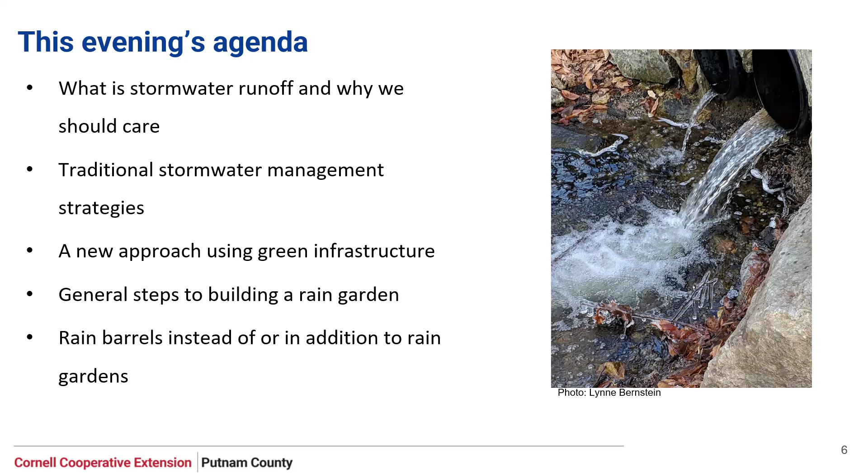In the next hour or so, I'll be talking about controlling stormwater runoff, that is the water that runs off our roofs, driveways, sidewalks, roads, and other impervious surfaces. I'll talk briefly about the way we've traditionally managed stormwater and why this approach is not optimal for our lakes. And then I'll introduce rain gardens as a viable alternative to existing stormwater infrastructure that is effective, economical, and beautiful. And finally, I'll talk about how rain barrels can be used in addition to rain gardens, or instead of one if a rain garden is not an option on your site. I'll also throw in a few other ideas for reducing stormwater runoff on our properties.

So what exactly is a rain garden? Well, it's a sunken garden bed, a landscape depression that's designed to capture surface runoff before it reaches a storm drain or water body. It's planted with native plants that filter and cleanse the water and allow it to infiltrate into the ground and into our aquifers, where it's accessible for drinking and other domestic uses.

On this planet that is about 70% covered in water, only 3% of the water is fresh water, and of that, nearly 70% is inaccessible to us, locked up in glaciers and ice caps. Our fresh water is continually moving through the water cycle. You may remember the water cycle from elementary school or middle school science. So our water is continually moving through the water cycle from the earth to the atmosphere, and how we manage it when it's with us on earth is critical to the quality and quantity of our fresh water supply.

You probably remember something about the water cycle from school. The rain falls and it's either taken up by trees and other plants that transpire it back into the atmosphere, or it infiltrates into the ground where it fills our wells and also maintains our lakes through groundwater flow.

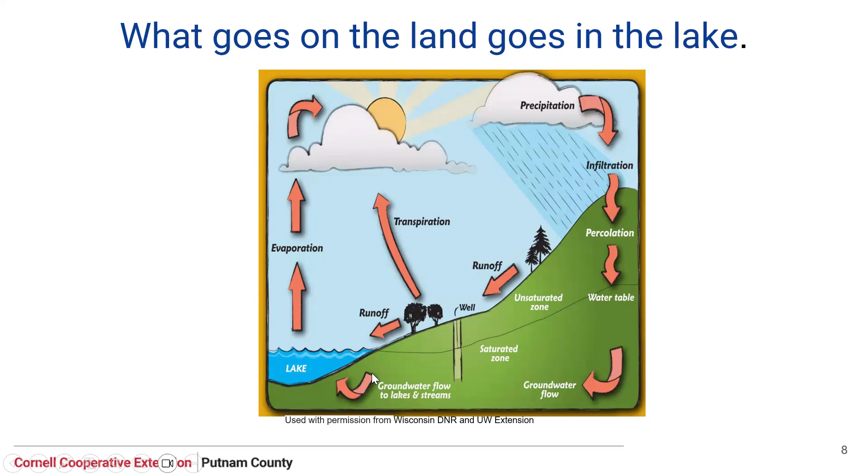I want to point out this arrow, groundwater flow, here. This is the rainwater that has percolated into the ground and is building up in the water table and basically supporting the lake by providing fresh water when the lake level is low, and it's there to sustain the lakes in times of drought.

and because there is this constant connection between groundwater and the surface water that's in the lake. We want our lakes to be filled with groundwater, not with runoff. Groundwater is filtered and clean, and that's what we want to see getting into our lakes. So this is what happens if things are working as they should.

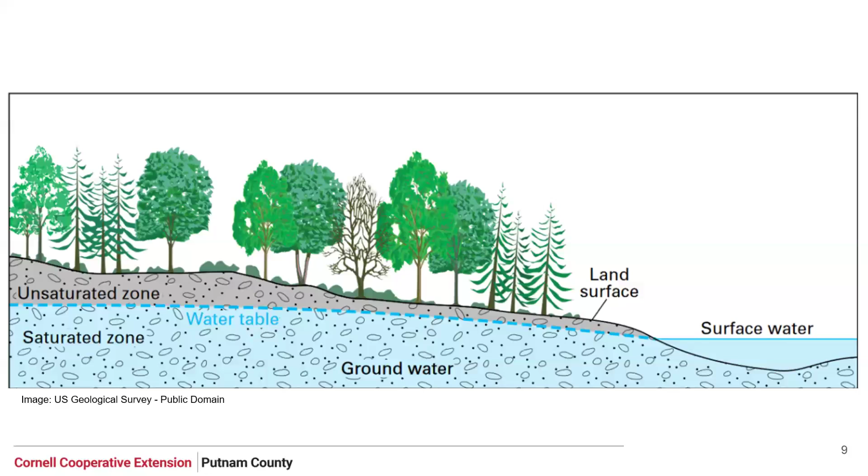But if not, precious rainwater runs off the surface of the ground directly into the lake or into a storm drain that empties into the lake. And that runoff carries with it all sorts of pollutants. So clearly, what we do on land has a big impact on what ends up in the lake.

Now let's look at how rainwater used to flow before the development of houses, roads, and other impervious surfaces. So if you look at the diagram on the left, it shows this water cycle that I just showed you before development. This is the way it used to work, and the way it might have been in Putnam County several hundred years ago. 50% of the rainwater fell on the natural landscape and infiltrated into the ground. 40% either evaporated or transpired into the atmosphere, and only 10% became runoff straight down the surface of the ground into the lakes.

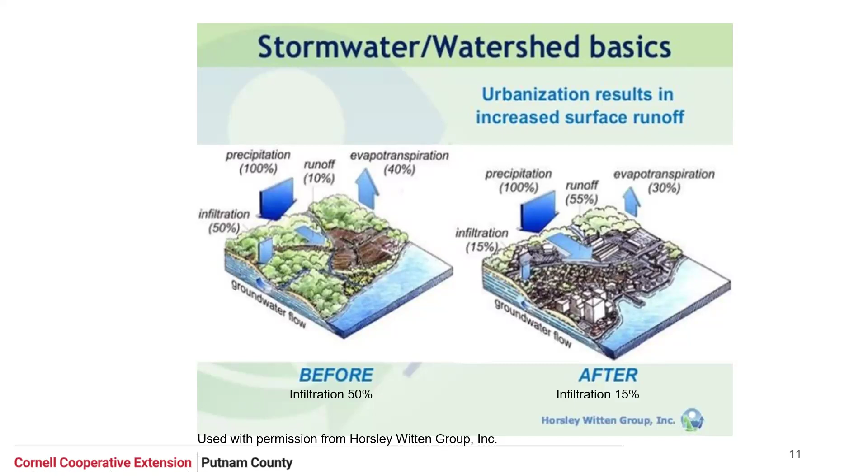The diagram on the right shows how this scenario has changed now that we've built up our towns and villages and cities. What happens now is only 15% of the rainwater infiltrates because it cannot get through these paved surfaces and hardscaping and roofs. And so 55% is running off straight down the surface into our lakes. And only 30% actually gets taken up because there are fewer plants, fewer trees to absorb the water and transpire it.

Despite all the rainfall that we have, and we have an annual average of about 50 inches of rain, only 15% of it infiltrates into the ground and 55% runs off into the water bodies, taking with it soil particles, nutrients that cause the overgrowth of algae, bacteria from pet waste and septic systems, heavy metals and oil and grease from the roads, sediment that clouds the water and destroys habitat, pesticides and herbicides that interfere with the lake's normal ecosystem functions, and other pollutants we don't want in our lakes. And this runoff is referred to as non-point source pollution. And our activities on land are the cause of it.

But it's not a hopeless situation. Since we cause it, we can also manage it. And we are now living with the impact of having 55% of our precipitation going to surface runoff instead of infiltrating into the ground. And this is important because the vast majority of Putnam County is served by private wells and relies on good quality groundwater. So caring for our lakes and caring for our fresh water supply go hand in hand.

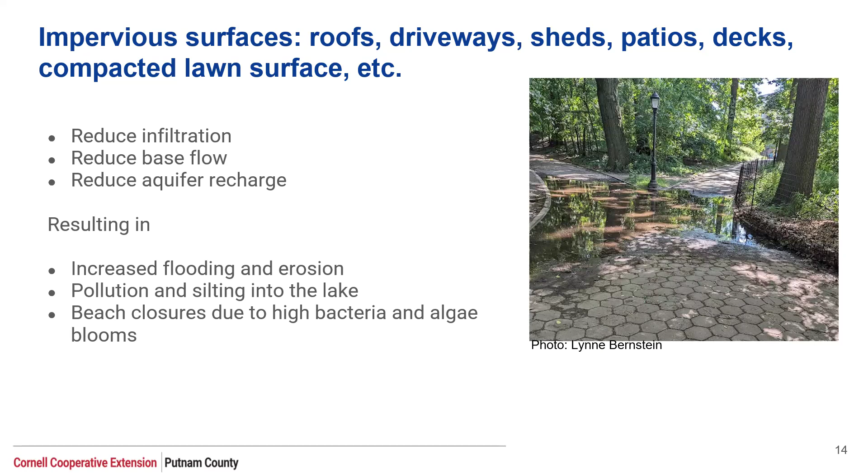Obviously, we can't go backwards. We can't eliminate impervious surfaces, but we can get our developed areas to function more like natural areas that they used to be. And green infrastructure is the answer. Specifically, green infrastructure that's distributed throughout the watershed so that each property manages its own runoff without sending it downstream.

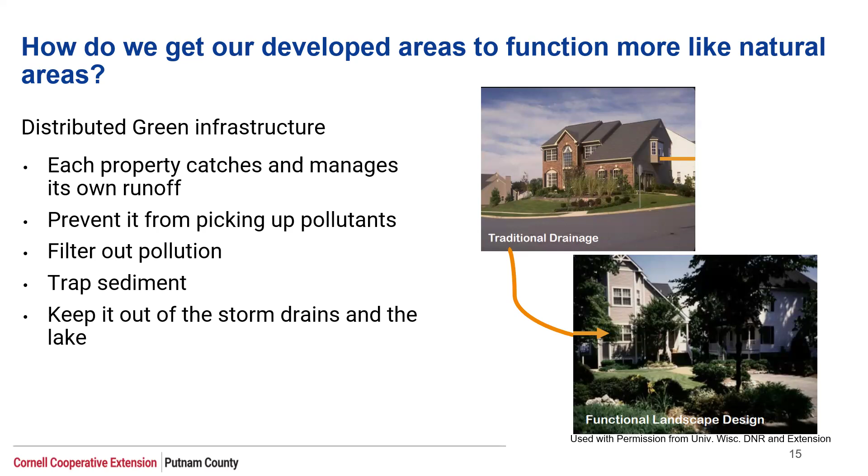By using the landscape to mitigate stormwater, we can change the situation one garden at a time. Because most property is privately owned, it falls to us as individuals to address our own runoff as close to the source as possible, as close to the impervious surface, as close to the house, the driveway, whatever is causing the runoff, so that we catch it before it becomes runoff. Because as soon as it starts to flow, it starts to pick up pollutants, and we want to prevent that.

And that is what rain gardens are all about. Each property catches and filters and infiltrates its own runoff, preventing pollution-laden stormwater from entering the storm drains and the lake. And as an added bonus, by diverting stormwater to rain gardens rather than sending it to the highway drains, we are also lessening the load on the municipal stormwater infrastructure, making it more effective and easier to maintain.

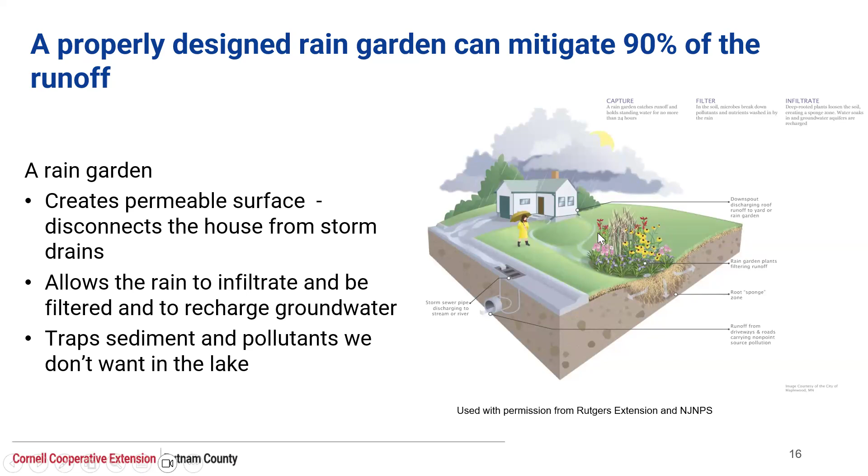So a properly designed rain garden planted with native plants creates a permeable surface that disconnects the source of the runoff from the storm drain system and prevents runoff from reaching the lake, allowing it to infiltrate and filter through the groundwater and recharge our aquifers. It is possible to mitigate most, if not all, of the runoff on a property with a well-designed rain garden. You can see here in this picture how the rain garden stops the runoff in its tracks before it reaches either a drain system or a lake.

Sorry, I think I went too far there. Rain gardens are not only functional, but also beautiful landscape features. They can be designed in nearly any style and have the added bonus of reducing lawn area and the associated mowing. So it's kind of a win-win here.

So where should you put a rain garden? How do you decide where to put it? Well, the first thing you want to do is identify the source of the runoff you want to mitigate. Is it coming from a roof, a driveway, a patio, maybe even the road? And you want to find a flat or a very gently sloped area that is close to the source where there's room for possible overflow. And it's important that the area drain well. The rain garden should not hold water for more than 24 hours.

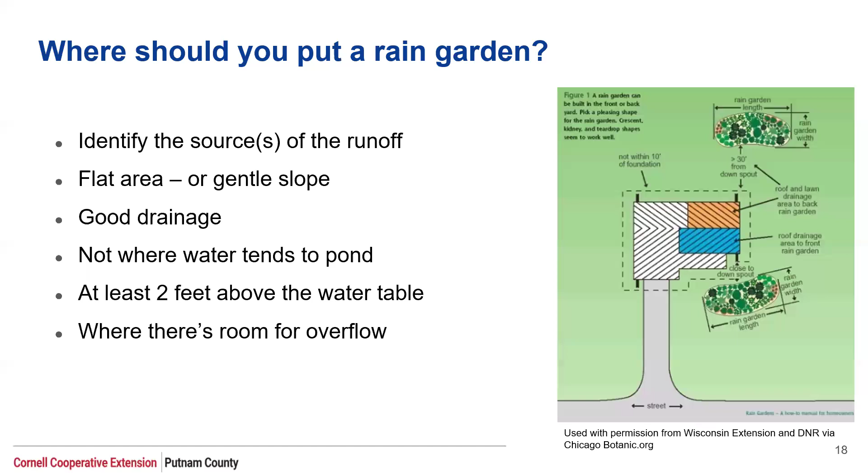So you definitely don't want to put it in a wet, boggy area. There, you can certainly create a bog garden. They're lovely features, but that's not a rain garden.

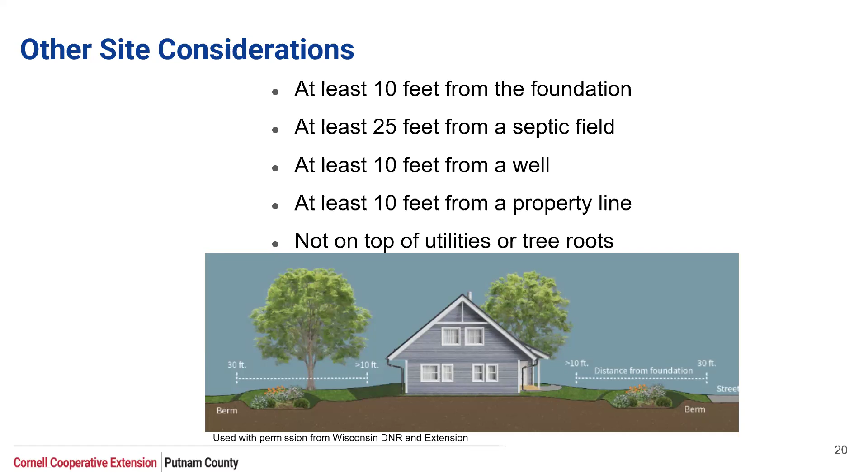A couple of other things to consider when choosing a site are that it be at least 10 feet from the foundation. You don't want to be sending all this water towards your house. You want it 25 feet from a septic field, so you avoid saturating the field. 10 feet from a well, 10 feet from a property line, and not on top of utilities. If you have public utilities with underground lines, you want to call 811 to have somebody come and mark off where those lines are. If you have private, like a private gas line or private water line, you'll need to call a private service vendor to come and show you where those lines are.

So another factor to consider in siting your rain garden is what kind of soil you have, because it impacts the percolation rate. So basically the three kinds of soil are sand, silt, and clay. And you can do a quick and dirty test to see the percentages of sand, silt, and clay: take a 1 quart jar and fill it with about 2 cups of soil, and then fill it the rest of the way with water, shake it up, and let it sit for a while.

You can also take your soil to the cooperative extension where they will perform the test for you and give you the results, so you'll know whether you have an appropriate site. The sandier the soil, the quicker it will infiltrate, and the smaller the rain garden can be. With a lot of clay, the soil won't infiltrate quickly. You'll be holding more water, so you'll need to make a larger rain garden so that it has room to contain all of the rain from that particular rain event.

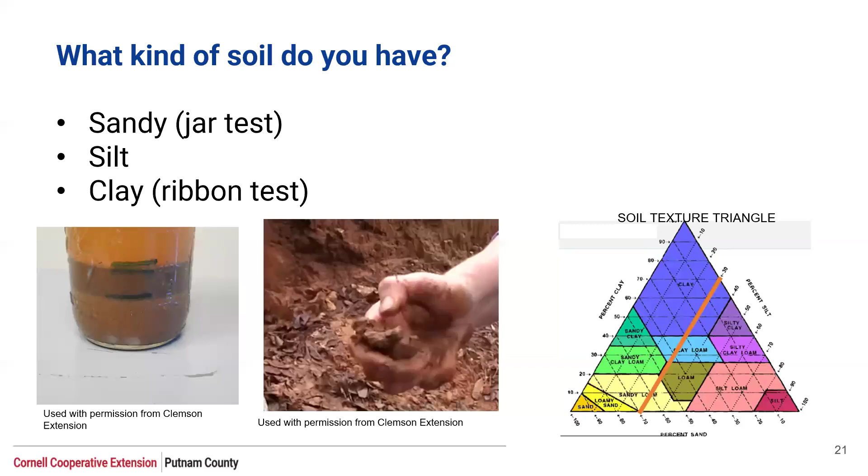Then again, before siting your rain garden, go out into your property during a rainstorm and maybe take a copy of your survey or draw a sketch of your property indicating the boundaries and buildings and other impervious surfaces, and kind of map how the stormwater flows, indicate the downspouts, where the water's coming from, where it's puddling, and anything that you notice happening during a rainstorm, because those are the things you want to be able to mitigate with your rain garden.

And by putting the rain garden in the middle, in between where the water's coming from and where it might naturally want to go, which would be the lake or the drain, you're intercepting it and breaking the connection and cutting off the runoff. And that is exactly what we want to do.

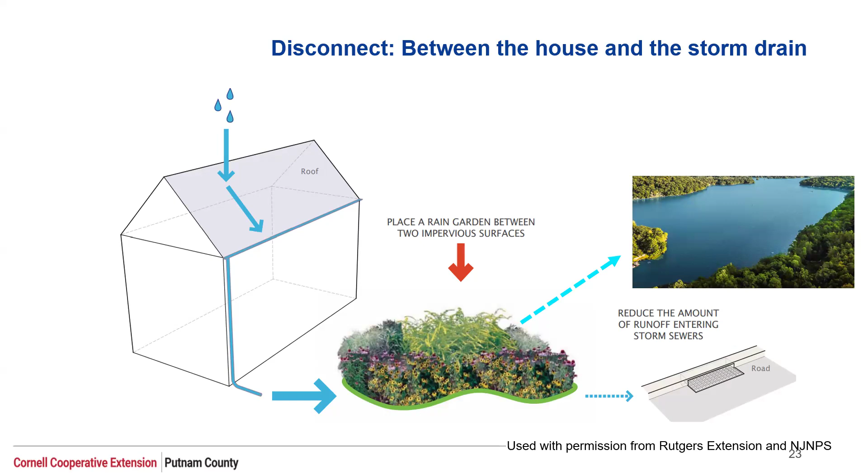The next question is, how are you going to get the water to the rain garden? So most commonly, it's coming from a downspout on your house. And you can do that very easily by attaching a pipe to the bottom of the downspout and running it into the rain garden. And it could be as simple as just one of these corrugated drain pipes that runs on the surface of the ground, although that could be a trip hazard and might be kind of unsightly. You might want to put it underground.

So next, you ask, how large should a rain garden be? Well, the average residential rain garden is between 100 and 300 square feet. Anything much larger than 300 square feet is really too big for the average homeowner to do, and you would need heavy equipment for that. But what you need to consider is how large is the drainage area that you're mitigating. If it's a roof or a patio, whatever it is, you want to know the square footage of that impervious surface and count on about 30% of that drainage area to be the size of your rain garden.

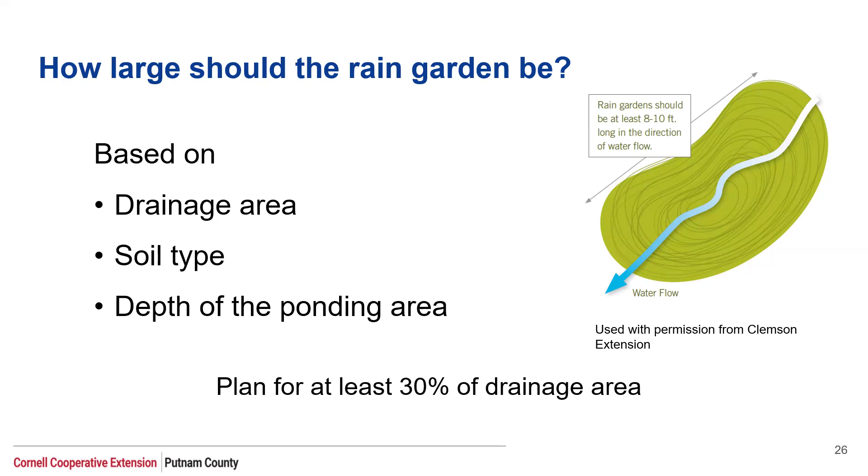But also soil type and the depth of the rain garden play a role here. So sometimes it takes a little bit of adjusting, maybe making it deeper, maybe putting in more permeable soil if things aren't working quite the way you want.

And to calculate the size of the impervious surface is simple. Length times width gives you the square footage. Here you can measure the roof. You don't have to go on the roof. You can just measure at the foundation or where the walls meet the ground. You just measure the length, and then you can determine the area.

And a 1,000 square foot roof. A 1,000 square foot roof area can generate 600 gallons of water during a 1-inch rain event. So that's something to keep in mind, that you might need to contain 600 gallons of water during our average rain events, although we are having larger storms these days, but that's sort of the rule of thumb.

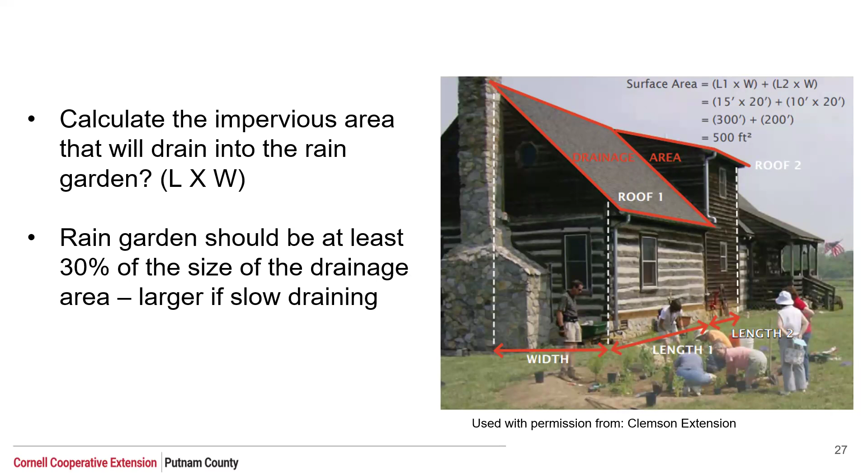And the next decision is, how deep should a rain garden be? Generally, 8 to 12 inches is adequate. Again, otherwise it's difficult for a homeowner to dig without heavy equipment. You know, you'd need to bring in a backhoe or something like that for digging. But the depth, again, is determined by the soil type and the percolation rate and the slope of the ground that the rain garden is going into. So the steeper the slope, the deeper it must be to hold the water.

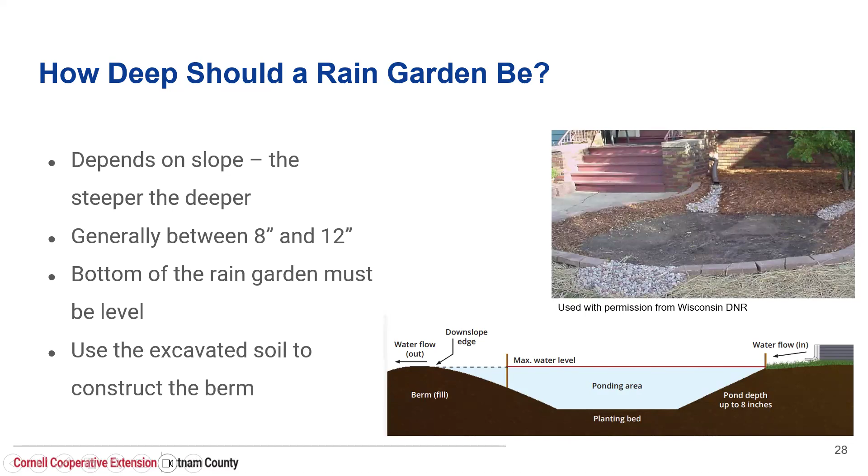Now, ideally, you don't want to put a rain garden on a steep slope, because the water won't stay in the rain garden unless you are building a really high berm around the bottom. So what you can do to determine your slope is, it's not too difficult. You put a stake in the ground at the top of the slope, assuming it's a gentle slope. If it's a totally flat area, then you don't really need to do this. You just need to dig it out about 8 inches.

But if you're on a little bit of a slope, which most of us are in this area, you put a stake at the top and a stake at the bottom, and you connect the two with a string. That's at the top at the ground and across to the downhill stake. And you measure the distance, the height of the string, assuming you have to make the string level.

You measure that height, and you measure the distance, and then you divide the height of the string to the stake by the distance, by the length, and you multiply by 100, and that is your percentage of slope. And you want to try to keep it less than 8%.

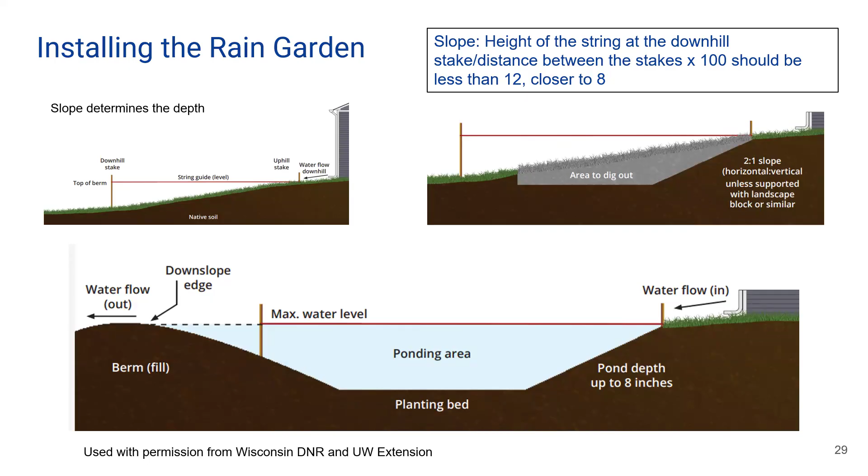Now, if all this sounds a little complicated, the University of Connecticut has come to our rescue with a rain garden app, which is online at rgapp.nemo.uconn.edu, and it will help you calculate the rain garden size and depth. It has a lot of nice articles and instructional videos about how to build a rain garden, and you can install it on Android or iPhone as well as on a browser.

And here, in this screen, you see it helps you measure your impervious surface using an overhead view from Google Maps. You just input the points of your impervious surface, your roof, your patio, your driveway, and it'll tell you how big your surface area is and calculate how big the rain garden should be. Oops.

And now the fun part is choosing what to plant. We use native plants in a rain garden because they are especially suited to rain gardens, because they have deep roots, much deeper than non-native plants. And those roots go down into the soil, they increase soil permeability, and they guide the water into the ground where we want it. And they're adapted to our climate.

They can deal with both flooding and drought conditions that we experience. And they support the soil microbes that are doing the important work of filtration, of taking in the pollutants and breaking them down and holding them so that it doesn't go down into our water supply.

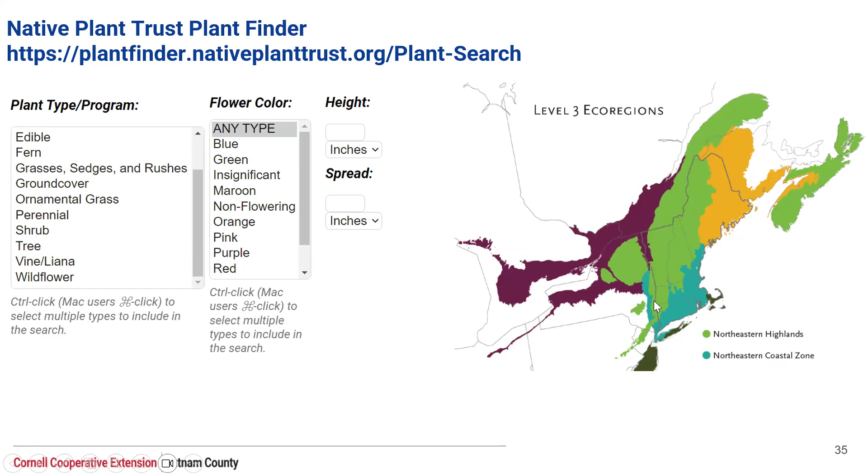An ecoregion: they classify the native plants based on the geographic area, which is an ecoregion in which they have similar geology, soil, and plant communities. So anybody in ecoregion 58, wherever they are, which might not be Putnam County, if you look back at this map, you'll see this whole area of green is ecoregion 58. It goes all the way up into Canada. And so the plants that are suitable in one part of ecoregion 58 are most likely suitable in any part. And then specifically, you want to check rain garden plants here, and then it will give you a list of plants that you can use in different locations in your rain garden.

Maintaining the rain garden, well, it's really not a high maintenance activity. Maybe for the first year or so, you want to be careful to monitor how it's performing. You want to observe it during a rainstorm and make sure that it's working as you planned it. You'll do some regular weeding as you would in any kind of garden. Yearly mulching, and that's really just for the first few years. I think eventually the plants will fill in and you will not be seeing bare soil. You won't need to mulch, but otherwise the mulch is going to keep the weeds down, hold soil in place, and keep the moisture in place so that the plants will survive during periods of drought.

You want to make sure that the plants are getting adequate water, especially in the first year. You might want to use a rain gauge. They want to get at least an inch of water a week, and so you might need to do some supplemental watering. And we encourage people to leave the stems and leaves over the winter, leave the stems standing, allow the leaves to fall to the ground. They are providing excellent mulch, the best mulch you can give your rain garden plants, and they're keeping the soil warm over the winter. They're providing habitat for very important pollinators and other insects, and the insects that are helping to decompose and filter the water. So you want to leave those things standing.

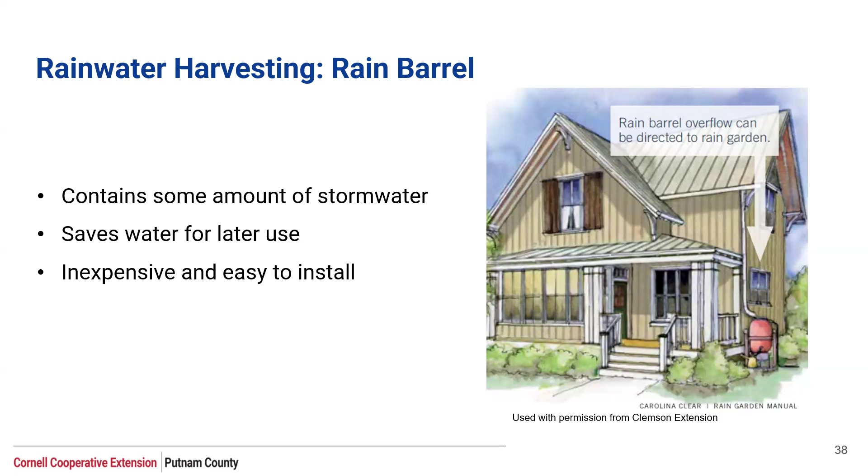They're inexpensive and they're easy to install. You can purchase them ready-made, or you can make one. These barrels, you can get these blue barrels or other colored barrels. You want to try to get food grade barrels so you're not introducing any kind of toxins into the environment. And there are kits available. They're very inexpensive that will sell you the spigots and the openings, and even include hole saws for drilling the holes in the barrels for putting in the spigot and the top.

But keep in mind that a 1-inch storm falling on 1,000 square foot of impervious surface will generate a total of 623 gallons. And one of these barrels is typically about 50 or 60 gallons. So you may need more than one rain barrel.

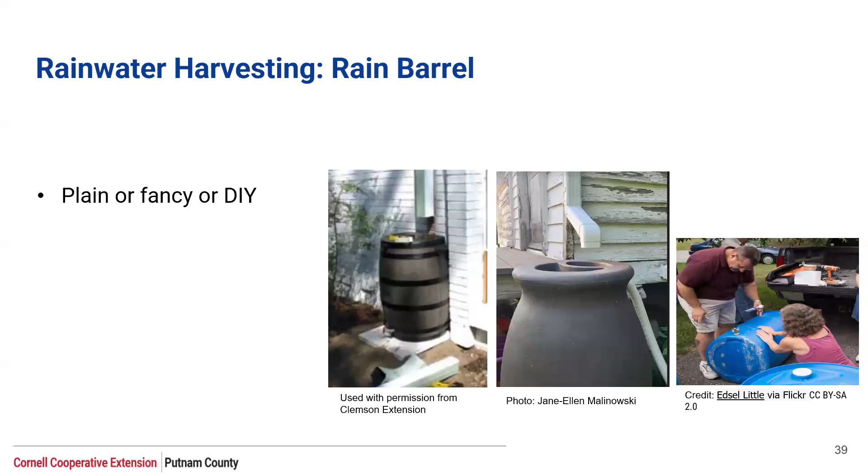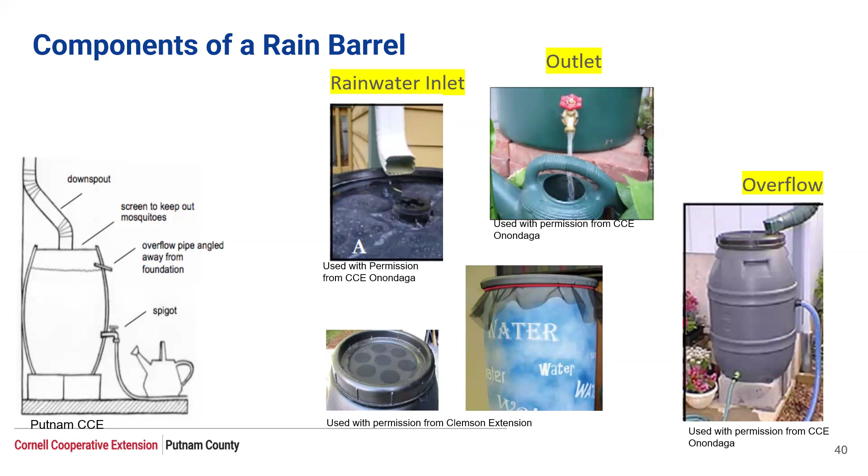And then you need an overflow because it may fill up, it may overflow, and you want that overflow water to be able to go someplace that you're controlling. And so a normal garden hose can be used for that. You want to direct it either to a lawn or a garden bed where it's not going to cause erosion. You can put some sort of little sprinkler on the end of it so that the water coming out of that overflow hose is distributed and dispersed a little bit and not going to be a powerful force that would cause erosion.

And that's because this water, the first water coming off the roof, is going to be the most contaminated by chemicals or maybe animal droppings, or other things on your roof that you wouldn't necessarily want in your rain barrel. So that gets siphoned off into this diverter, and then once that fills up, the rest of the water then goes straight into the rain barrel.

You might want to put a submersible pump into your rain barrel so that you can get the water further away and maybe a little bit more forcefully than the rain barrel could otherwise produce. If you want to hook it up to a sprinkler system, probably a drip irrigation system would work. You definitely would need a pump for something more than just drip irrigation.

You might also want to put a filter on your intake that would go into the rain barrel to catch any debris, leaves, acorns, anything else that might wash into the downspout. Unless you have guards on your gutters, then that might be an adequate filter.

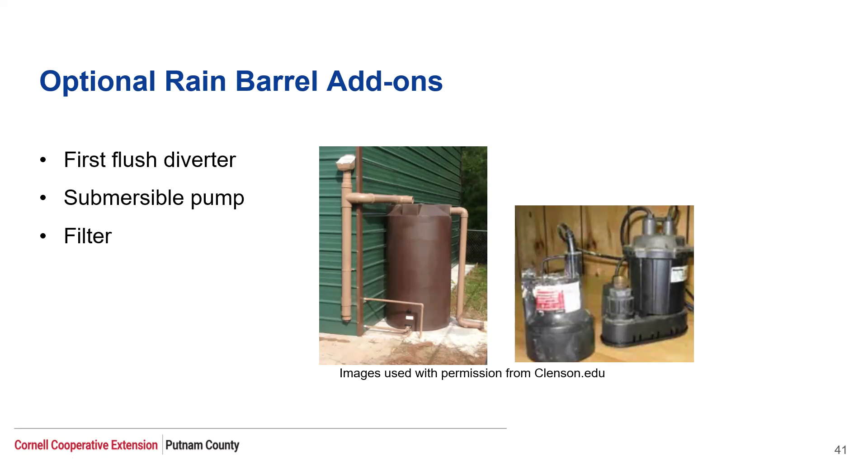Installing the rain barrel, you want to position it next to a downspout so you can get the water conveniently from the downspout into the barrel. You can use a rain chain if you don't have a downspout that just comes down from the gutter. You want a solid base, a level base, because a filled rain barrel could be 400 or 500 pounds. You don't want it tipping over.

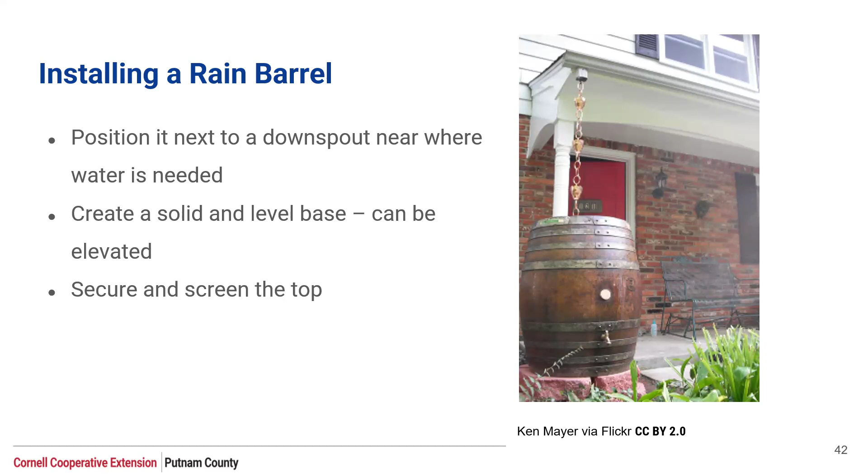If you elevate the rain barrel a little bit, a foot say, you'll get some additional pressure out of the barrel. So you'll get the water a little further and you might be able to use it a little bit further away. You want to make sure that the screen is secured at the top. That's very important. Now you might find that you need or want more than one rain barrel.

Maybe you have several downspouts that are not near your rain garden, or you don't have a rain garden. So you might want to daisy chain the rain barrels, and you can do that in several ways. Instead of having an overflow that just runs out on the ground, the overflow goes into another rain barrel. That's one way to do it. Or you could connect them at the bottom. When you connect them at the top, one will fill up and overflow into the other. When you connect them at the bottom, they will all fill at the same rate.

And remember, the roof area times the number of inches of rain times 0.623 gallons equals the gallons of water that you will be collecting in your rain barrel. So that gives you an idea of how many rain barrels you might want to install.

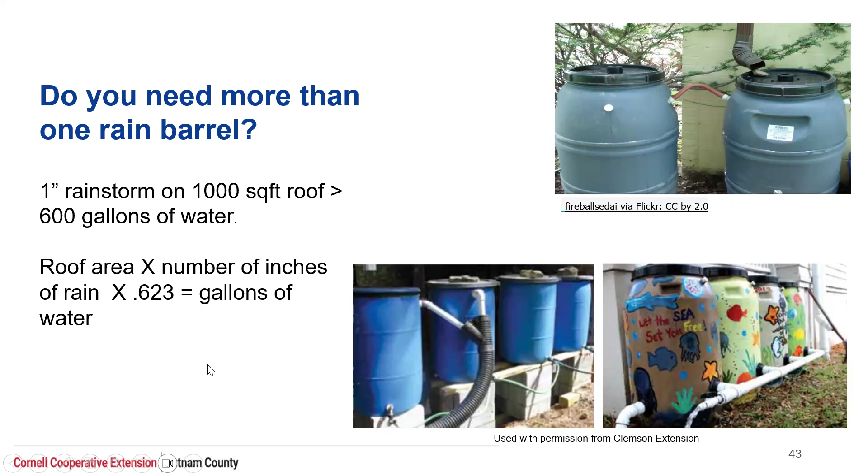Rain barrel maintenance is pretty simple. There's not a whole lot to do, but you do want to make sure you empty your rain barrel regularly, certainly in between storms, because if it's full from one storm, then it won't be able to take on any more water at the next storm. You can use the water for just about anything, but not to water vegetables. That's because we don't know what's in that water if it's coming off your roof. So you want to use it for other things. You can water any other plants with it, just not edibles.

You want to clean it yearly, keep the debris out, check for leaks, especially if it's outside during the winter. You want to make sure it doesn't crack in the winter. Check the screens to make sure they're tight and nothing can get in, and check that the overflow is not causing erosion. As I said, you can put a sprinkler at the end of the overflow, and that would distribute the water a little bit more evenly so it doesn't cause erosion.

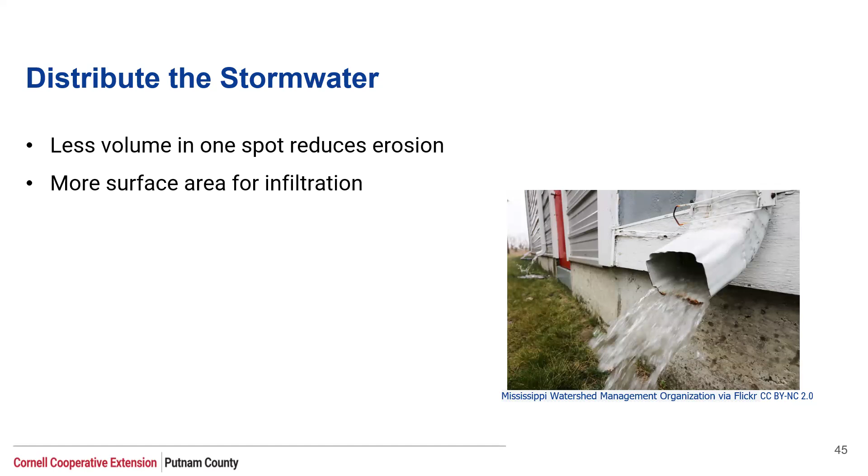Now, a couple of other things we can do to minimize stormwater runoff. And one of them is just to make sure we distribute the water. So instead of having a single downspout coming off your roof, if you could break it up into several different downspouts, that's less water in a given spot, and the ground might be better able to absorb and infiltrate what's coming off those downspouts. We can also use porous, pervious pavers to reduce runoff and encourage infiltration.

And we can see these things being used more often now. And it's a good idea if you're redoing a driveway or building a patio to consider using a permeable surface instead of a hard impervious pavement.

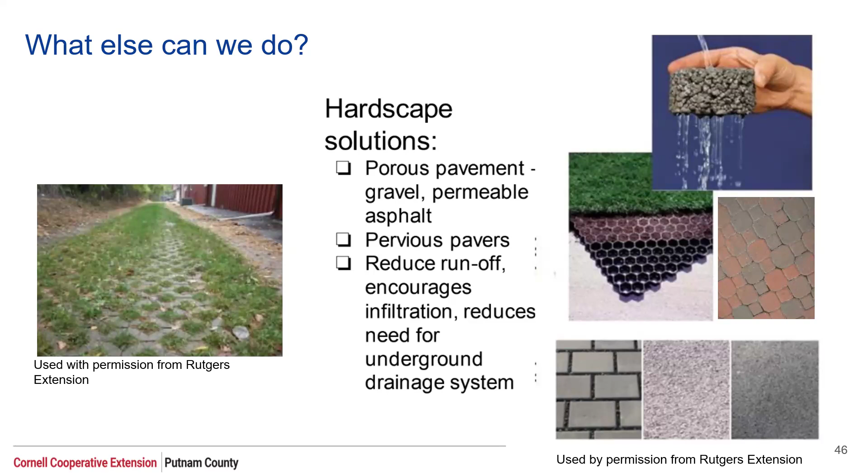In some places, stormwater is such a big issue that they are taxing residents for stormwater management. But on the other hand, if you implement a rain garden or rain barrels, you can get a tax credit based on the amount of square footage of impervious surface that you're mitigating. So this is a direction that it would be nice to see our towns and county moving in. It would certainly help with flooding and dealing with the runoff caused by our roads.